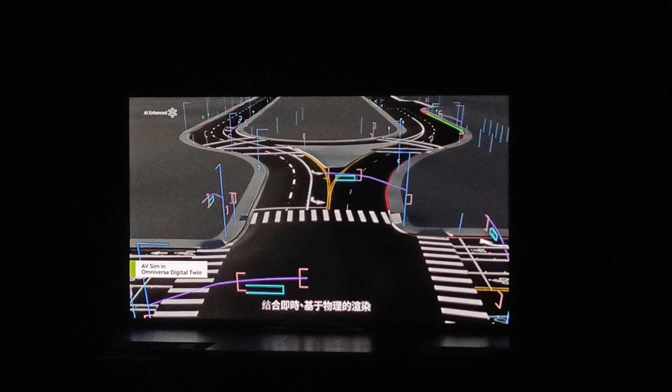We built NVIDIA Omniverse as the operating system where physical AIs can be created. Omniverse is a development platform for virtual world simulation, combining real-time, physically based rendering, physics simulation, and generative AI technologies.

In Omniverse, robots can learn how to be robots. They learn how to autonomously manipulate objects with precision, such as grasping and handling objects, or navigate environments autonomously, finding optimal paths while avoiding obstacles and hazards. Learning in Omniverse minimizes the sim to real gap and maximizes the transfer of learned behavior.

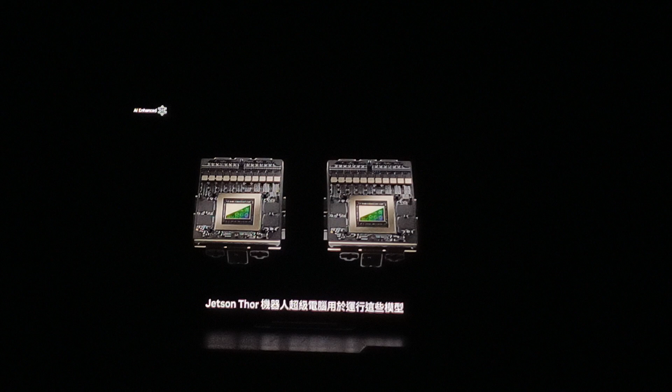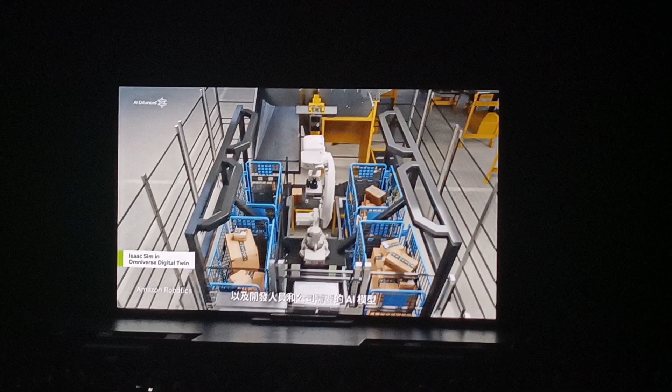Building robots with generative physical AI requires 3 computers: NVIDIA AI supercomputers to train the models, NVIDIA Jetson Orin and next generation Jetson Thor robotic supercomputer to run the models, and NVIDIA Omniverse, where robots can learn and refine their skills in simulated worlds. We build the platforms, acceleration libraries, and AI models needed by developers and companies, and allow them to use any or all of the stacks that suit them best.

The next wave of AI is here. Robotics, powered by physical AI, will revolutionize industries. This isn't the future, this is happening now.

There are several ways that we're going to serve the market. First, we're going to create platforms for each type of robotic systems. So one for robotic factories and warehouses, one for robots that manipulate things, one for robots that move, and one for robots that are humanoid. And so each one of these robotics platforms is like almost everything else we do: a computer, acceleration libraries, and pre-trained models. Computers, acceleration libraries, and pre-trained models.

And we test everything, we train everything, and integrate everything inside Omniverse, where Omniverse is, as the video was saying, where robots learn how to be robots.

Now, of course, the ecosystem of robotic warehouses is really, really complex. It takes a lot of companies, a lot of tools, a lot of technology to build a modern warehouse. And warehouses are increasingly robotic. One of these days they'll be fully robotic.

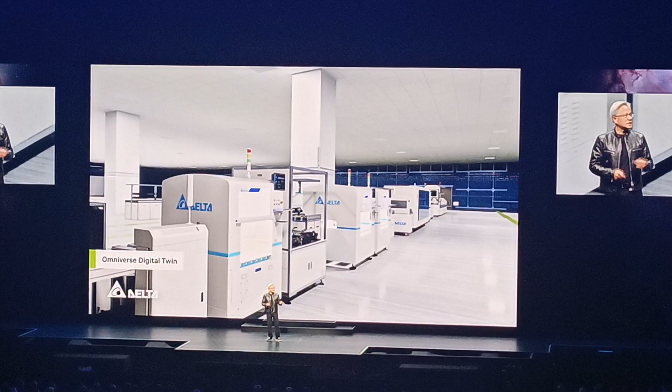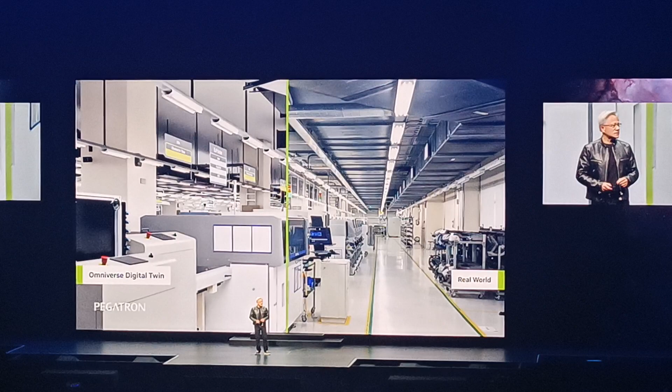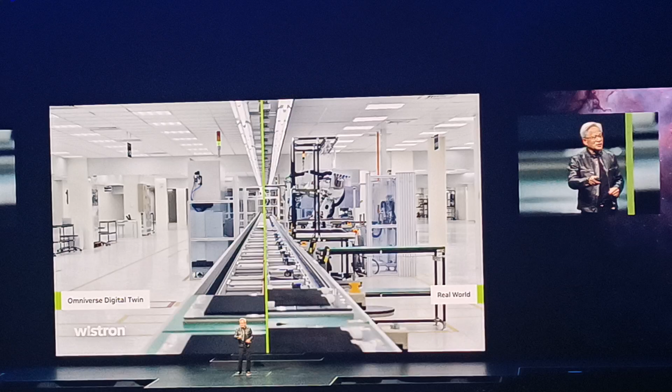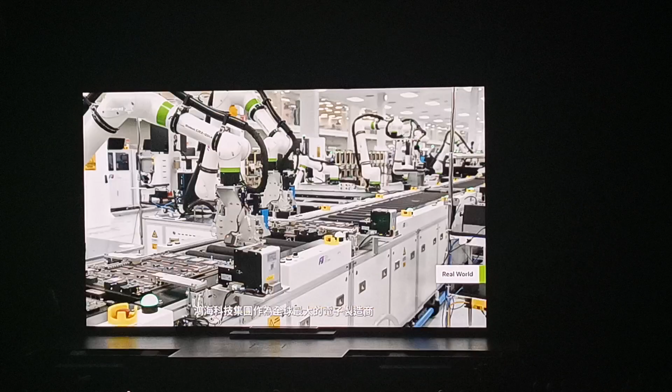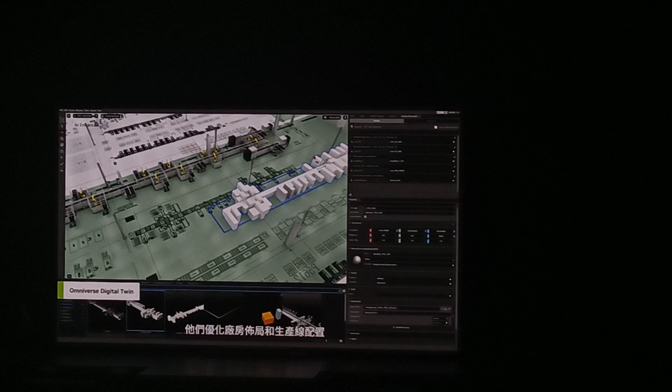Demand for NVIDIA accelerated computing is skyrocketing as the world modernizes traditional data centers into generative AI factories. Foxconn, the world's largest electronics manufacturer, is gearing up to meet this demand by building robotic factories with NVIDIA Omniverse and AI. Factory planners use Omniverse to integrate facility and equipment data from leading industry applications like Siemens Teamcenter X and Autodesk Revit. In the digital twin, they optimize floor layout and line configurations and locate optimal camera placements to monitor future operations with NVIDIA Metropolis-powered Vision AI.

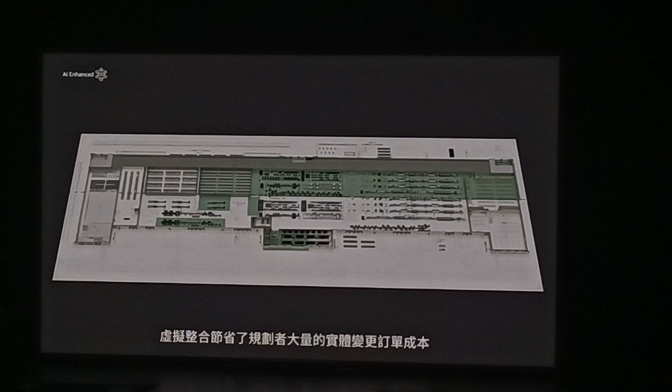Virtual integration saves planners on the enormous cost of physical change orders. During construction, the Foxconn teams use the digital twin as the source of truth to communicate and validate accurate equipment layout.

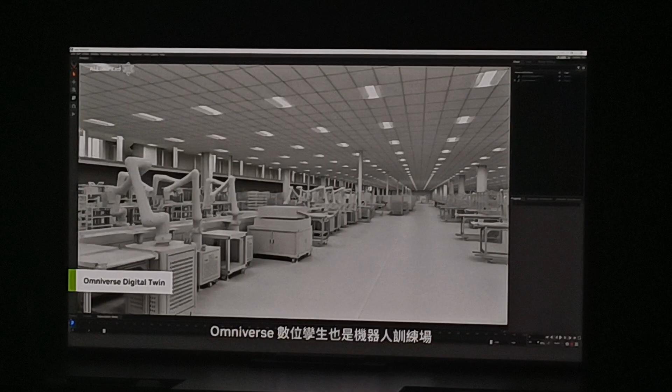The Omniverse digital twin is also the robot gym, where Foxconn developers train and test NVIDIA Isaac AI applications for robotic perception and manipulation, and Metropolis AI applications for sensor fusion.

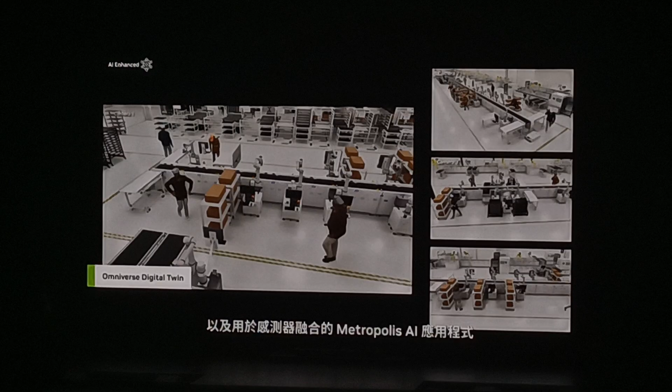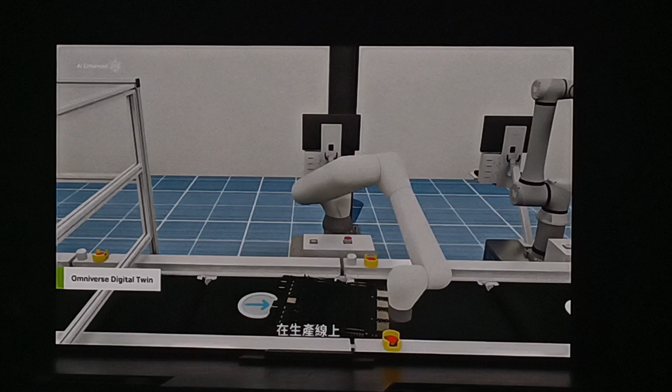In Omniverse, Foxconn simulates 2 robot AIs before deploying runtimes to Jetson computers. On the assembly line, they simulate Isaac manipulator libraries and AI models for automated optical inspection for object identification, defect detection, and trajectory planning. To transfer HGX systems to the test pods, they simulate Isaac Perceptor-powered Ferrobot AMRs as they perceive and move about their environment with 3D mapping and reconstruction.

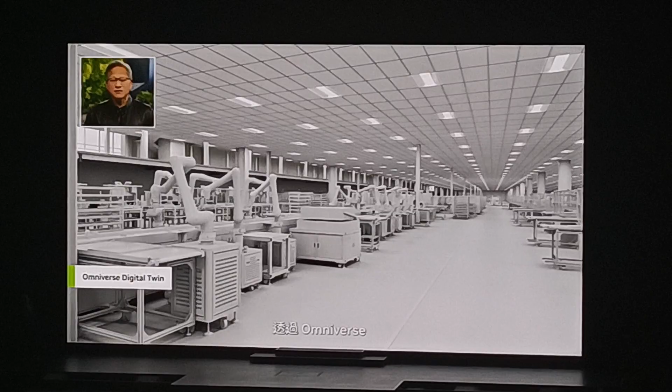With Omniverse, Foxconn builds their robotic factories that orchestrate robots running on NVIDIA Isaac to build NVIDIA AI supercomputers, which in turn train Foxconn's robots.

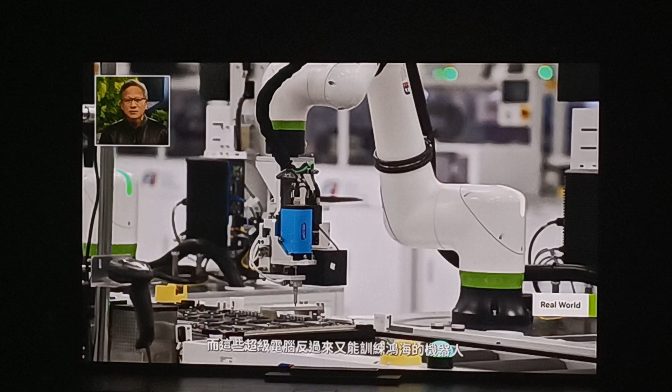So, a robotic factory is designed with 3 computers. Train the AI on NVIDIA AI. You have the robot running on the PLC systems for orchestrating the factories. And then you, of course, simulate everything inside Omniverse.

Well, the robotic arm and the robotic AMRs are also the same way, 3 computer systems. The difference is the 2 Omniverse systems come together, so they'll share one virtual space. When they share one virtual space, that robotic arm will become inside the robotic factory. And again, three computers, and we provide the computer, the acceleration layers, the...